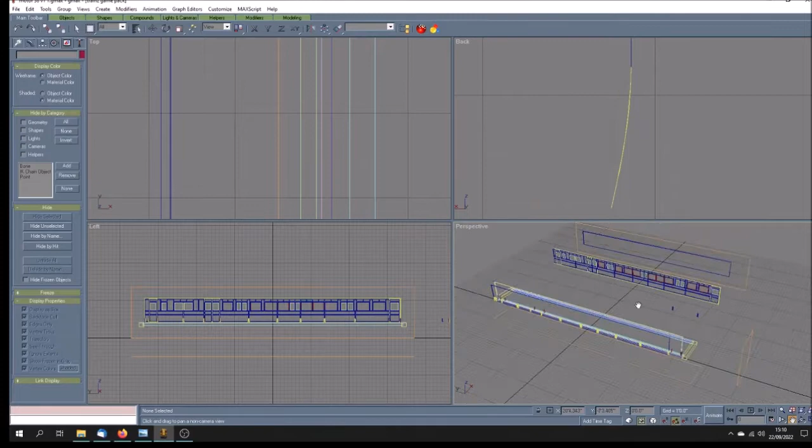So here we are in Gmax, and I have a couple of books about the rail motor, and from one of them I was able to get some outline plans. You can see here quite a lot of effort gone into getting all of the beading and panelling, and I got this done fairly quickly, and it's only now, after several weeks of work, 3 or 4 weeks of work on it, that I realise it's wrong. But there you go, that's the way things happen.

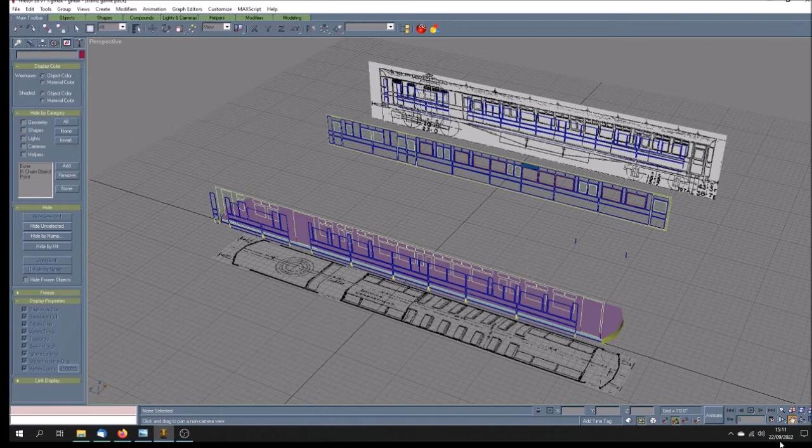So here it is, I'm doing motor 38. Now these rail motors were introduced from about 1906, and there were about 100 in the fleet altogether, and although 93, that one that's been restored, is the only surviving rail motor restored into full working condition, at the moment it's back in its shed in Didcot, because its 10-year boiler certificate now needs a new certificate to be obtained.

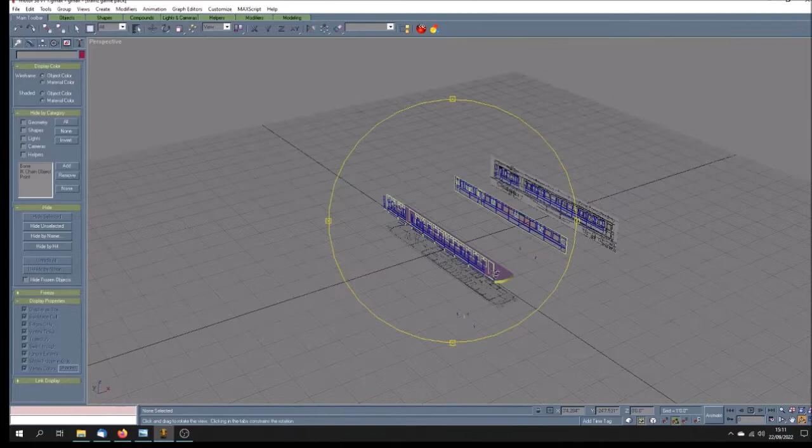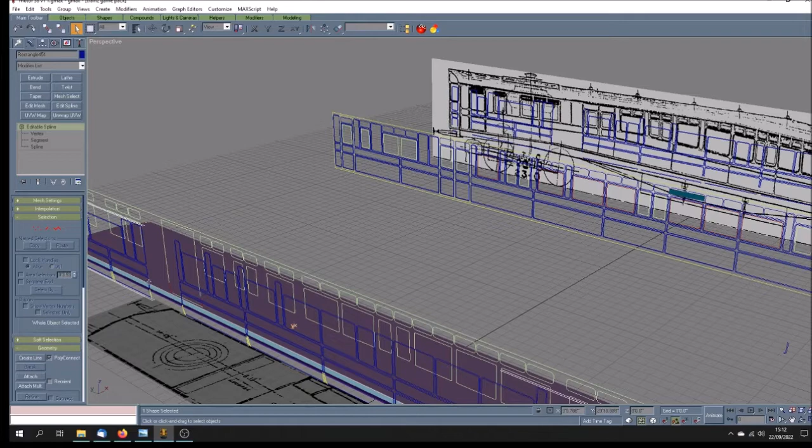So this is where I started, and I was planning to allow for the panelling. You can see there I've got lots of splines. If I just click on one, you'll see what I mean - that's a spline there. So let's have a look at all the vertices, and this is the flat, but of course it's got a tumble home - it's got a curve in the bottom of the sides there, so you have to allow for that, and believe me, it's been difficult.

It's probably the best way to describe it. But anyway, I have got on slowly. This is just version 1.1, as you'll see in the top left there. So let's open another version.

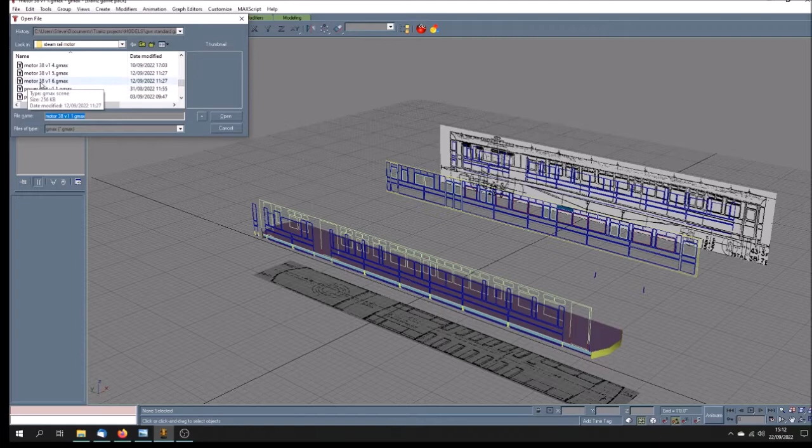No, we're not going to muck about with it. Let's jump forward to version 1.6, and you'll see immediately that there's quite a bit more work.

I always save the different versions, because if I have to go back to change things, as indeed I'm now going to have to do, having just over the last few days realised I've done the panelling completely wrong.

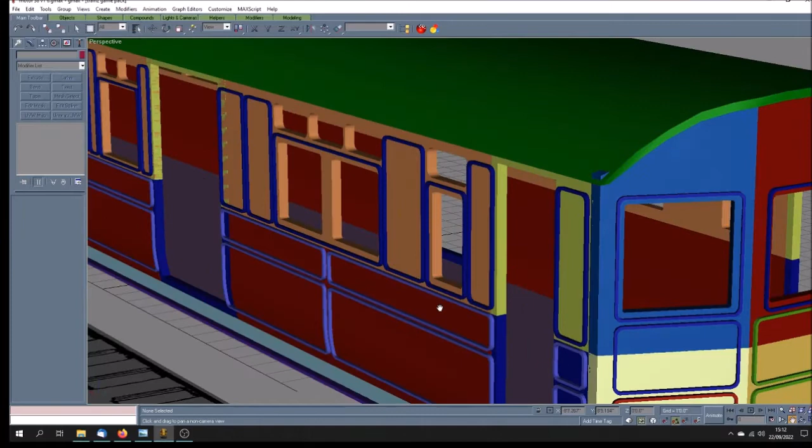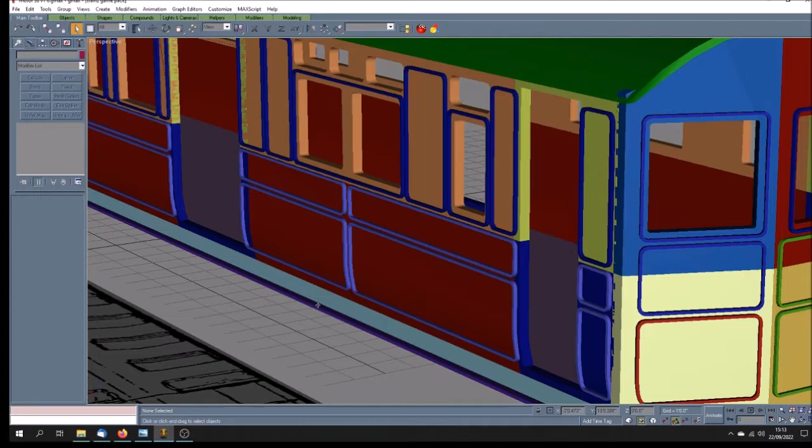And the reason why I say it's done completely wrong is you'll see in these bubblegum colours of the actual meshes that I've got the sides here in sections, and then I've actually got what should be panelling done as raised meshes from the side. So what I've got to do is look again at my plan, and basically I've got to alter all of those. They just can't stay as they are.

Let's just get that texture correction so you can see. What I've done is I've sort of traced around that, but then I've assumed it's been a raised beading. Well, of course that's not the case. If we have a look at that plan, come in a bit - all of this is the outer edge, and there's another outer edge there, so this should be recessed back about half an inch to the carriage side. This stands out about half an inch. This is an inset panel, comes out half an inch.

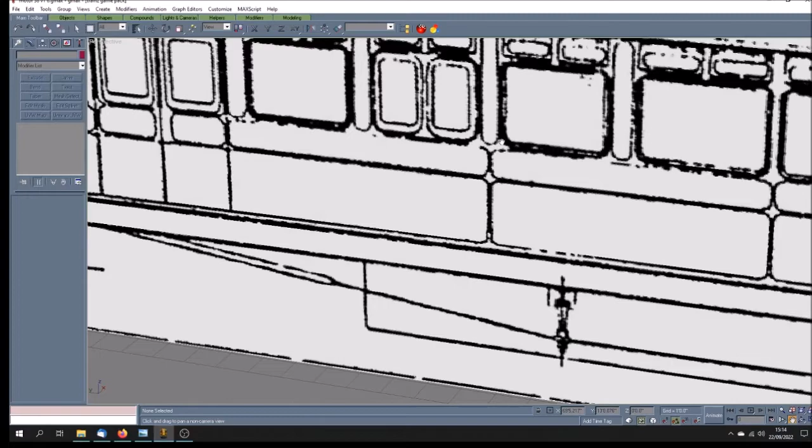So basically what I've got to do is redraw all these, because when I created these in the first place I've drawn into the thickness of that line that led up the garden path. So I've got to change all of these, alter the way in which they're appearing, and you'll get an idea of what I mean when I show you, because I'm going to be producing versions in both the maroon, which is that lovely colour, very Edwardian colour for the GWR.

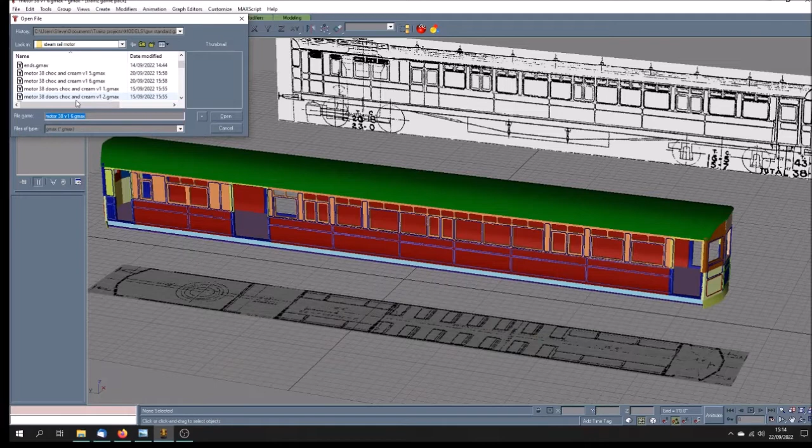So I shall be producing versions both in this colour of every rail motor that I do, and also in the later chocolate and cream. So let's open up one of those versions.

Ah, that's the doors, that's no good, just chocolate and cream doors, and in fact those are all wrong because I've got to alter the way in which they appear. Here we go.

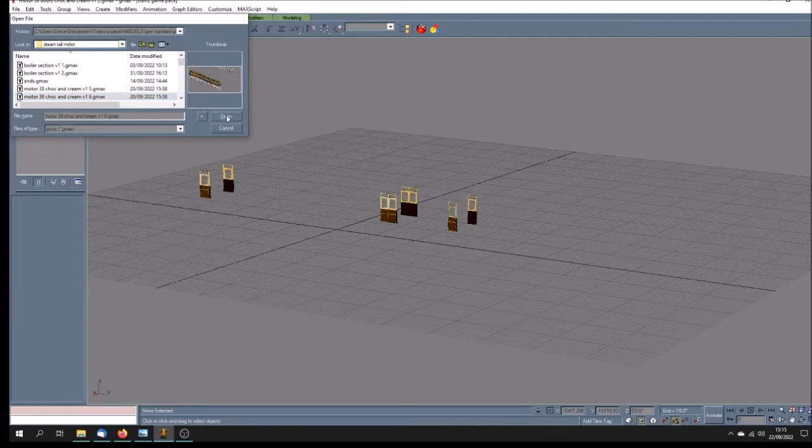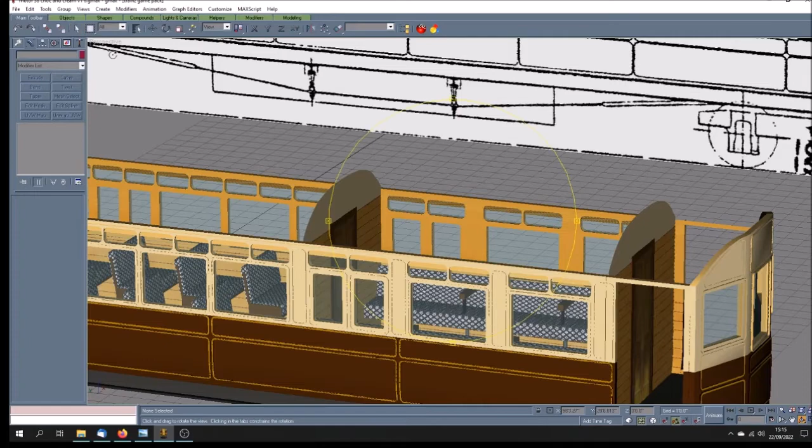So here's the interior as well as the exterior, and you can see there what I've done - this is the reason why I've done all those meshes. I think it'll be a bit more obvious if you look at the side. If you look over here in the right hand corner, you'll see that what I've done is I've just created a beading, raised beading all the way around, and that's wrong. What it must be is, this isn't a beading, this should just be the inner edge of the rather complex mesh which comes out to the edge here.

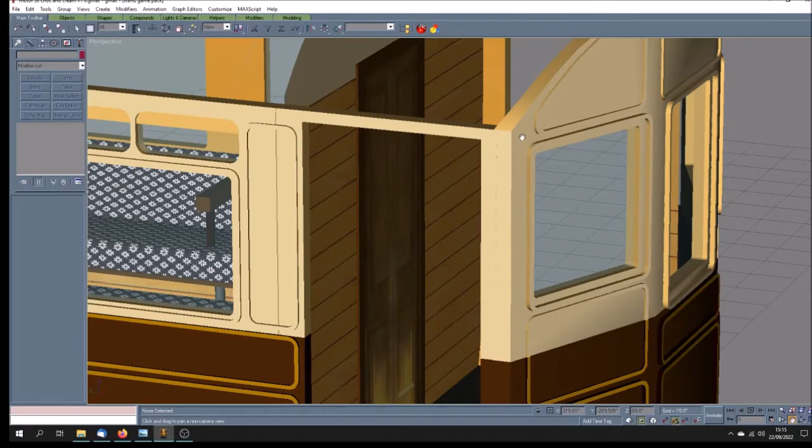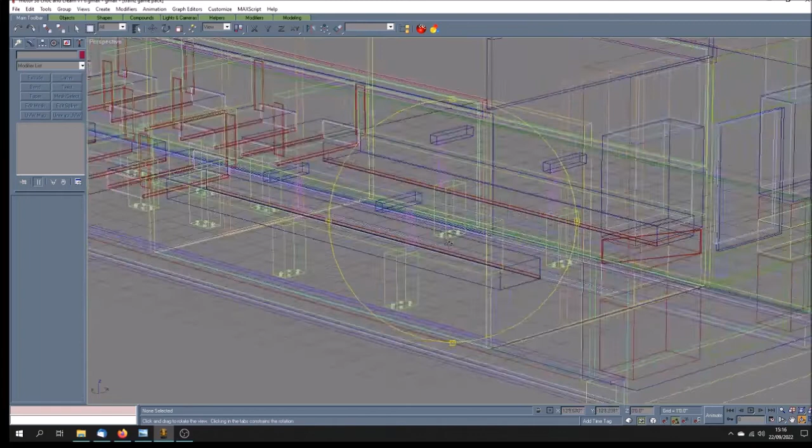So all of this should be half an inch deeper, and then once I've done that, on this chocolate and cream version, it's not too bad, but then the lining, as you can see here, I've actually used that beading. I've painted it, it's a bit too wide for the lining. So once I've got the beading on correct, in the correct colours, in the chocolate colour, and I've got an inner area here - I know this might sound complex, but it just takes time.

Once I've got that correctly done, then what will happen is that all of this area will be half an inch deeper than this, sticking out half an inch from this, which is the inset panel, and then this lining out will be thinner, and will simply - we can't see it on the maroon one - but these upper sections are going to be lined out.

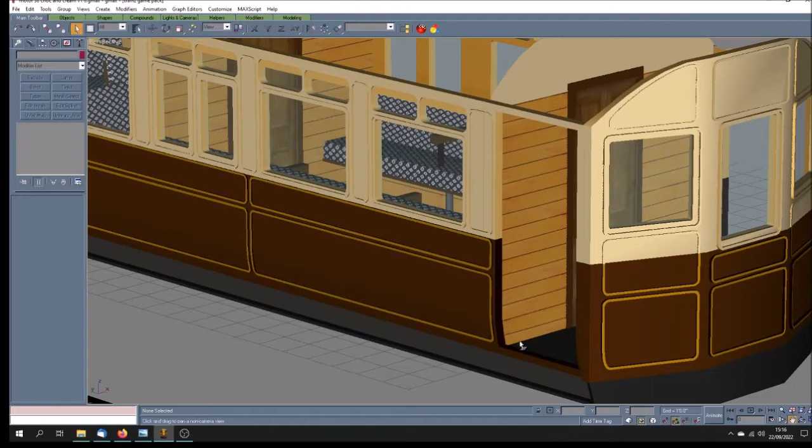So that's what I've done wrong. I've done this correctly in other GWR carriages. I took a fit of the head staggers and did it wrong. But you can see that apart from that, I've been getting on with the interior.

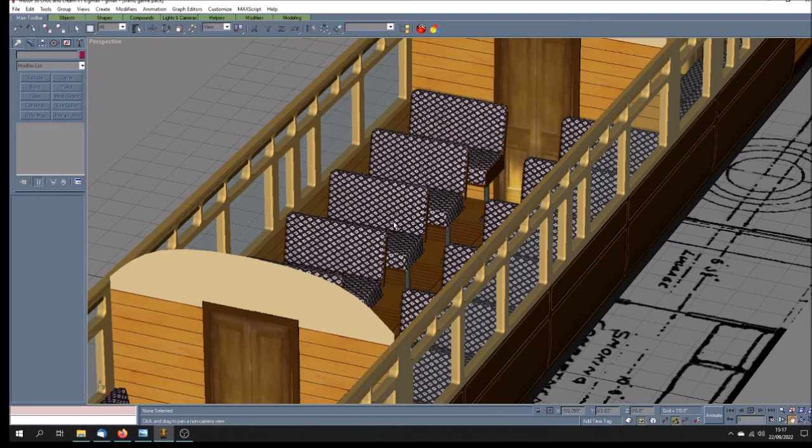Now this is the correct texture as fitted to both the rail motor and trailer at Didcot, and we've got the interior doors, sliding doors, and I've got the floor with these wood slats in the correct position, and this is a smoking compartment down here.

I'm not quite sure what this compartment is. Oh no, this is the - there we are - this is the smoking compartment, it's this compartment down here. Actually, it looks like here I'm wrong, and that I shouldn't have that partition in there. I need to lose that, so I'll do that.

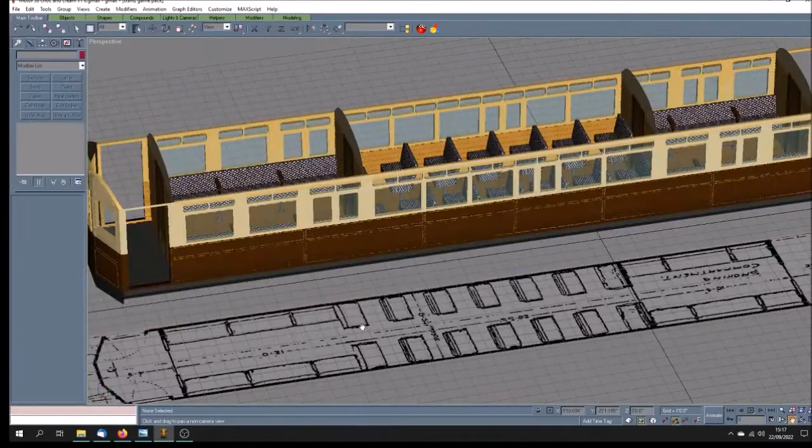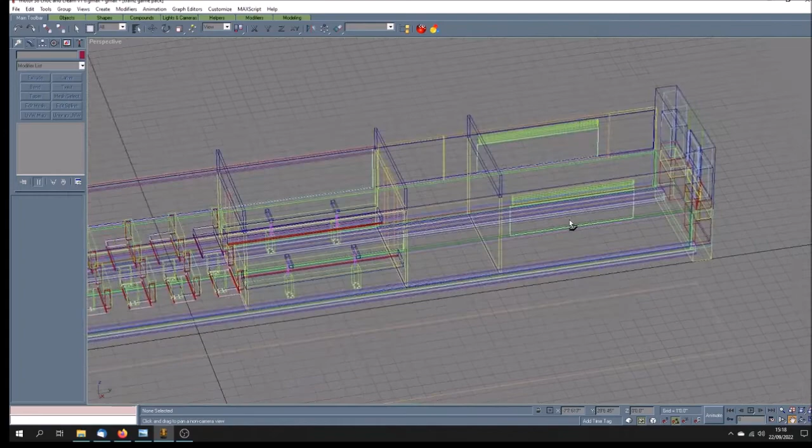So we get more of a sort of open saloon, and underneath the roof, which I've hidden in this display, there will be longitudinal poles and straps. So strap hanging comes in with these rail cars. And this is the power compartment, so this will be the driving compartment. This is where the boiler is going to go, and I'll come on to the boiler in a minute, because that's going to be another great big job in itself.

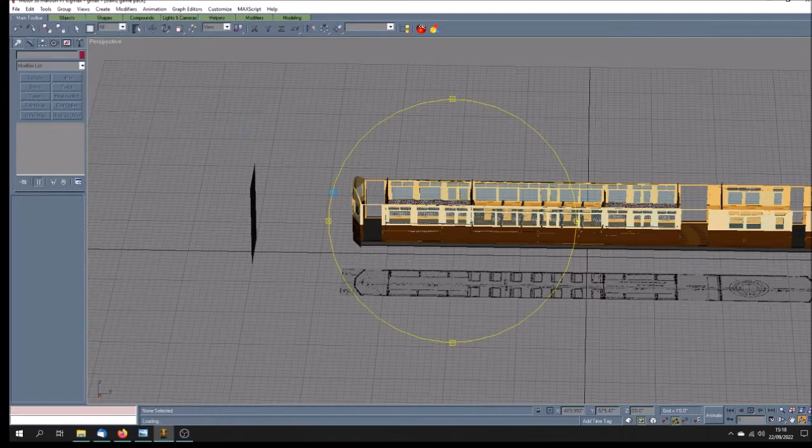Well, apart from doing this and more or less getting it wrong, so I've got to go back and do that, but that's okay. What else have we got? We've got the maroon version. There's the doors, maroon. Now I haven't done the interior on this, and obviously what I'll do is I'll copy the interior from the chocolate and cream version over to this.

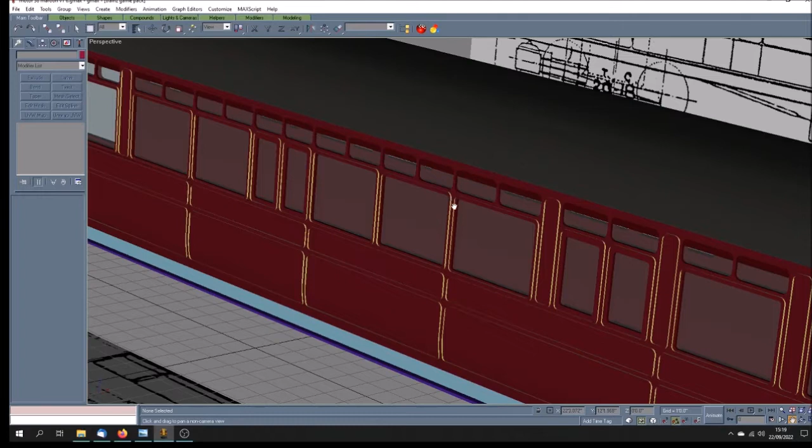And what I did wrong here is that on that panelling I've actually edged it with the lining out colour, which is wrong. That lining out colour, you can see it more easily here, should be on top of this, not on the edge. And in fact that edge shouldn't be there, that should be just raised up across to the next bit. So it's a real object lesson of being patient and being prepared to rip apart everything that you've done and do it again.

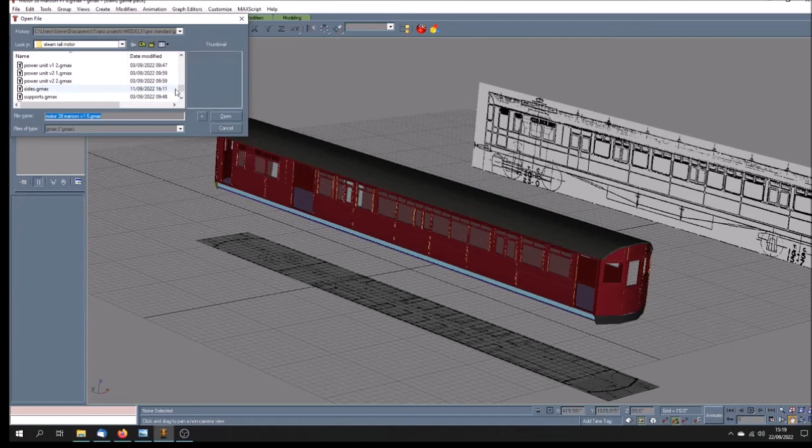But happily, I've also done the power bogey, and this was in fact one of the first bits that I did. I always tend to start with, if I'm doing a locomotive, and this of course is partly a locomotive... Cancel. What am I doing here? I'm just trying to save that. Power unit, here we are. Just open that. There we are.

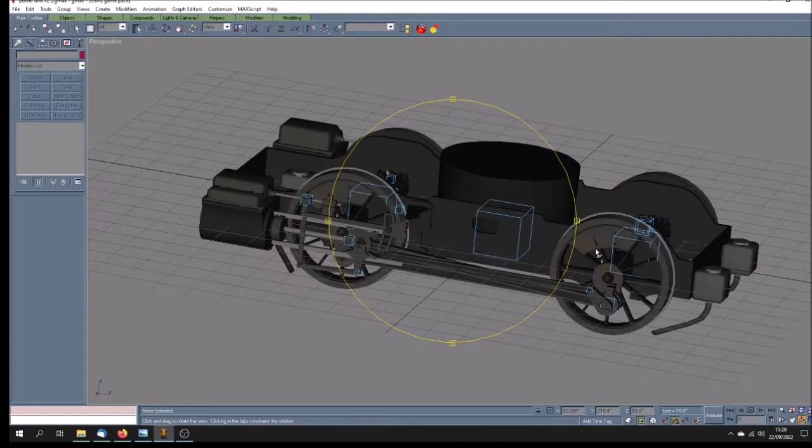So what I've done here with the power unit is, as with all of these, it's a bit of a compromise, and it took a little while. It's Walschaerts valve gear. Now, there's still some detail to add to this, and you also get some strange effects when you pull back in Gmax. You get spokes appearing where there shouldn't be, where the balance weight is in the wheel.

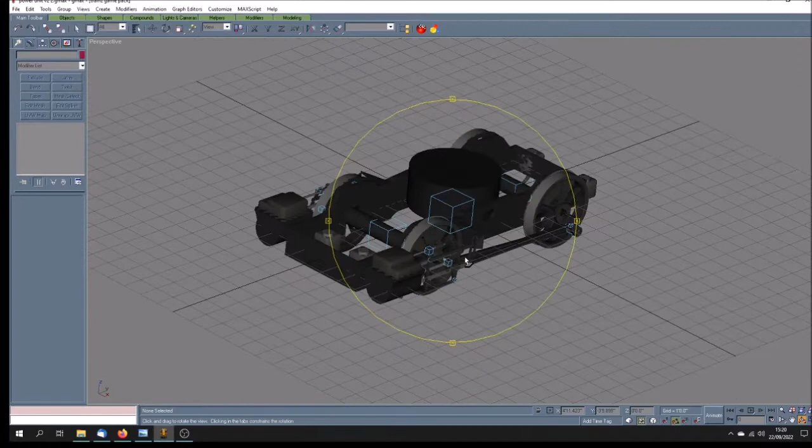This is the bottom of the boiler, and it's coming up to floor level, but this is going to be the power bogey for Trainz. In the originals, a whole lot rotated very slightly in the cab - at least that's how I read the book, I'm assuming it's right. But anyway, for Trainz, happily, it's more straightforward than that. So let's have a look at it actually running.

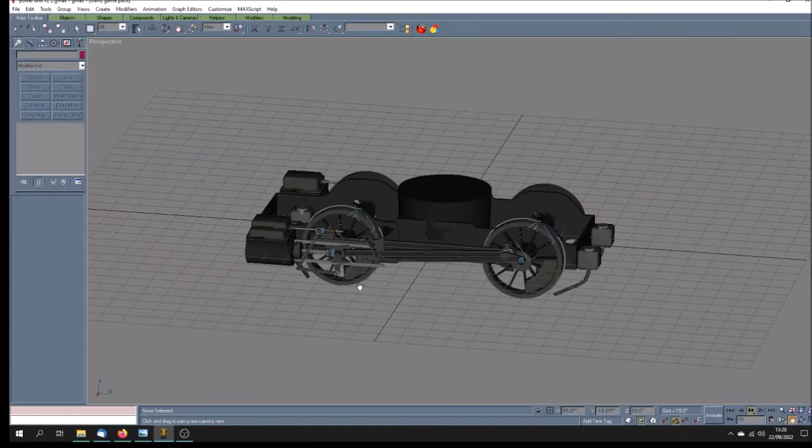So there we are, that's the Walschaerts valve gear firing away. That was fun making, because there's quite a lot happening, and actually it's a simplified version of Walschaerts valve gear which I've made for this, because to have done the whole thing, every part, it would have been extremely complex, and it would have put the poly count way up, so we don't want that.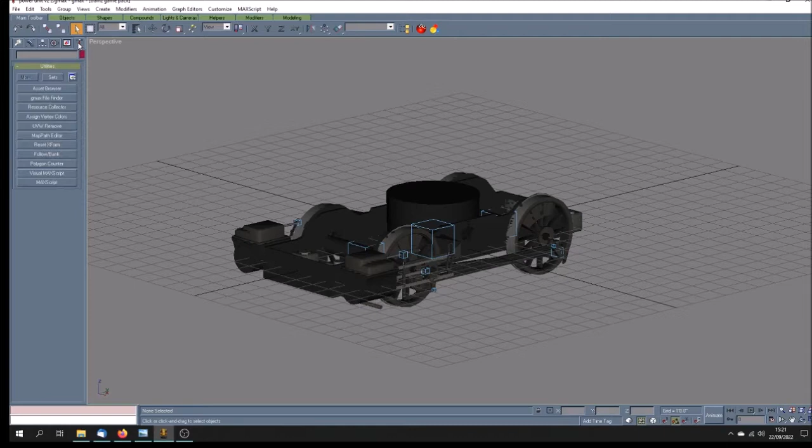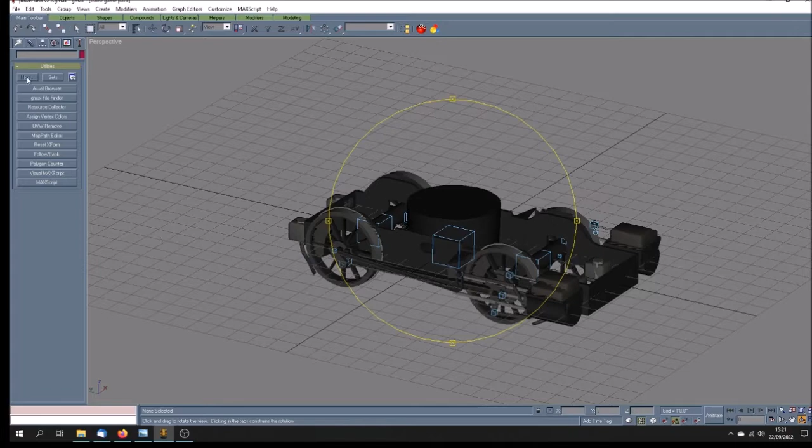So there we are, let's just go back to 0 there, and just to give an idea of the poly count for this one, it's just under 10,000 for this bogey alone. So if I add some detail, and the sort of detail I'm thinking of adding are some bolt heads, some rivet heads, which will each essentially just be a piece of a plane. There we are, one poly plane with a bolt head on it, just pasted on to various places where it's meant to be.

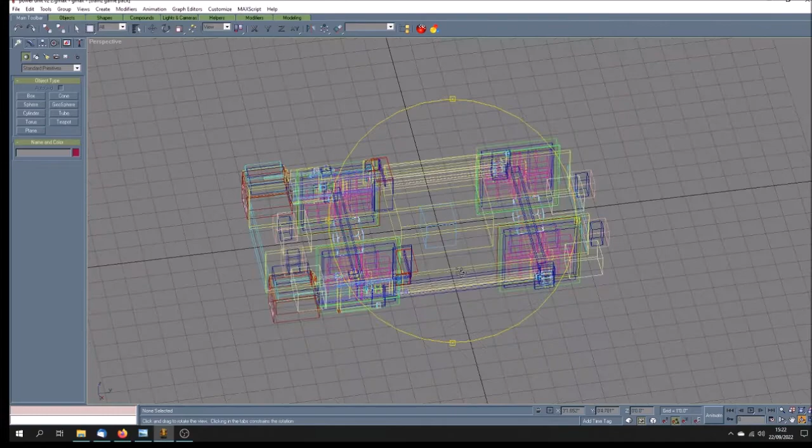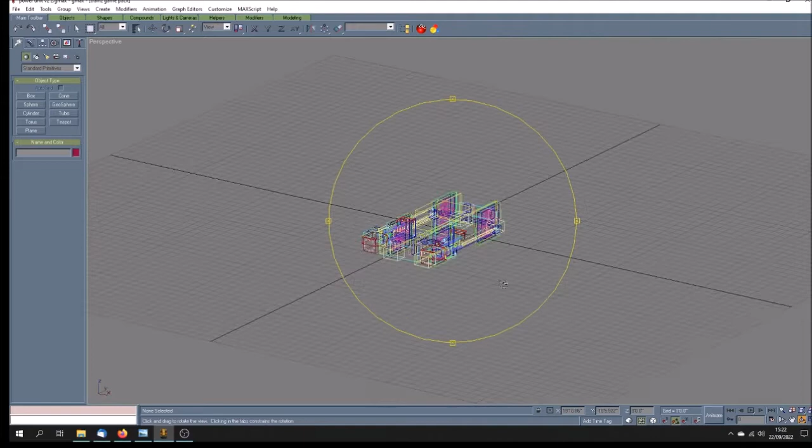But that is more or less how it should be, I'm just looking down on that. I've simplified this framework here. On the original, the guys in Didcot did a fantastic job recreating all of this, and so I chickened out - there was a curve in part of this which I just ignored. Essentially, of course, once we get it onto the vehicle, the main item in Trainz, you're not really going to notice it.

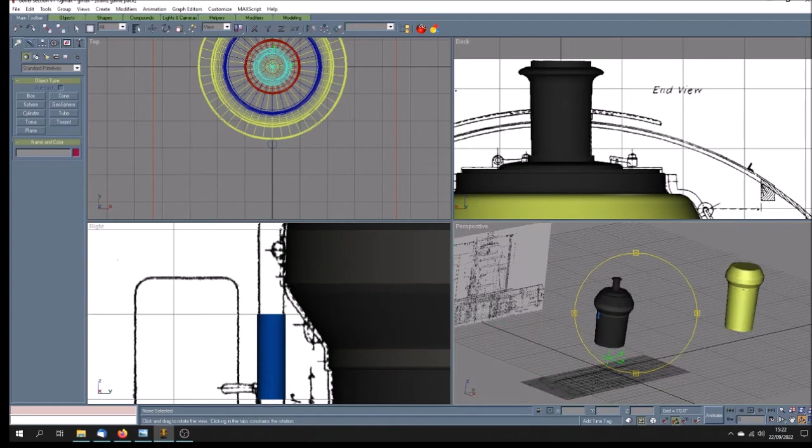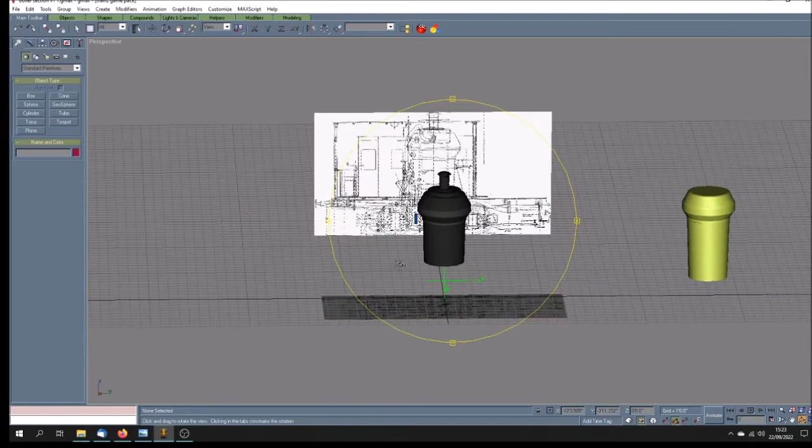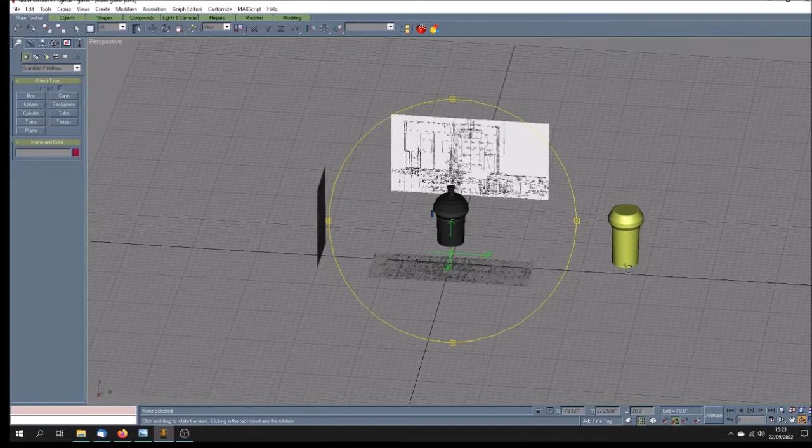In fact, it was when I started on this I realised - I think it's Russell's book on the Great Western Railway locomotives. Years ago I'd looked at this particular diagram of this rail motor, and I thought, my goodness, I'm never going to be able to make that, and I've never tried to make it, so this really is something new for me. So this is just the first stage, and you can see I've got the main sort of shape of the boiler, and I've got a bit of tube there, and I've also kept a copy of the boiler just here, just in case - so this is part of my construction process.

And what you can see, I'm not sure what I've got down there, is that main?

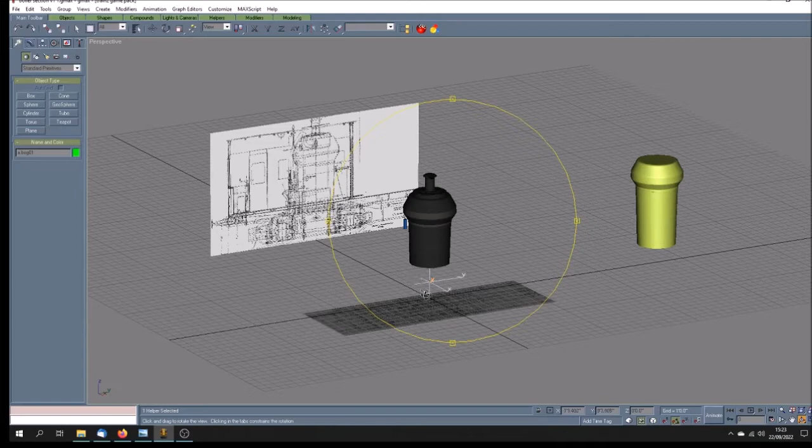No, a bogie one. That's where the first bogie is going to go. So that Walschaerts valve gear bogie which you saw is going to sit under there, and that circular piece which you saw on the top of the Walschaerts is actually going to marry up to this. Because it's circular, if that bogie moves slightly, pivots around going around a curve, it doesn't matter because this won't move.

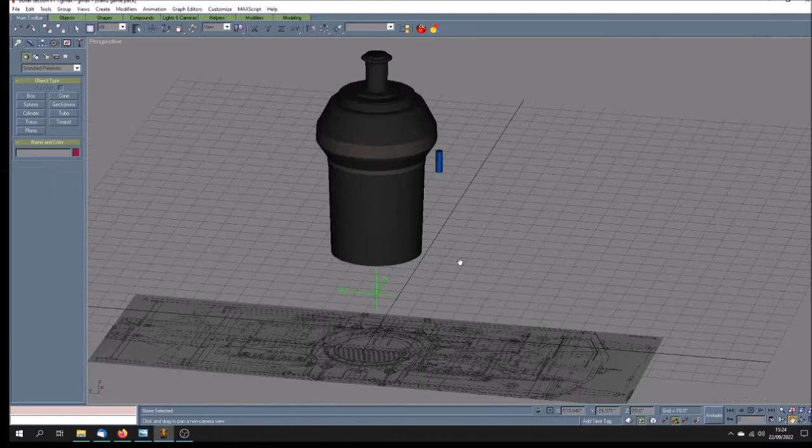I've got some very good photographs, especially of the restored rail motor number 93, as I bought a couple of books. They're proud as punch, and very proud indeed of all their efforts, considering how long it took them to reconstruct from the somewhat parlous state of the original vehicle. I think they've done a fantastic job, and it's going to be a really lovely addition to the Great Western Railway fleet, and I'm enjoying making it.

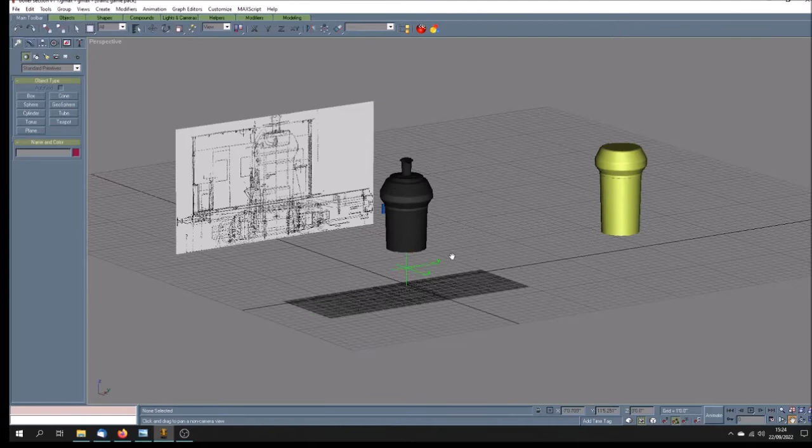I'm going to take my time. There's not going to be another video for another month, I wouldn't have thought, to show any progress, but I thought I'd bring you up to date on what I'm doing at the moment. So eventually we shall have Great Western Railway.

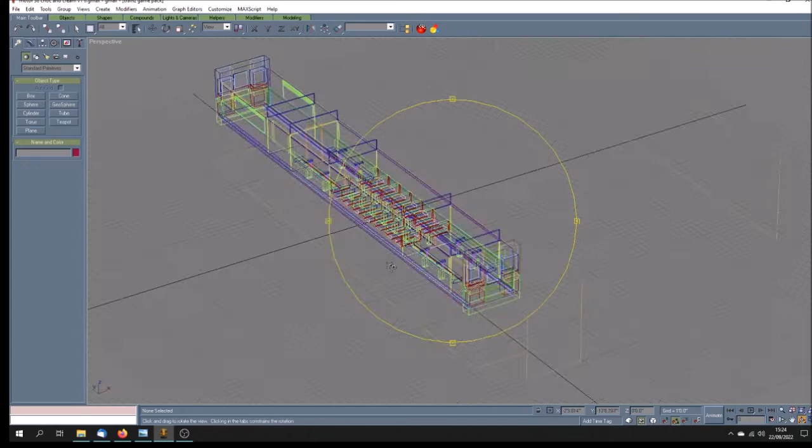Let's have a look at the chocolate and cream one again. Here we go. We'll eventually have the Great Western Railway rail motor, and this is just number 38. As I say, there are about 100 of them, and a number of different versions, particularly seating details, that sort of thing. Sliding doors there.

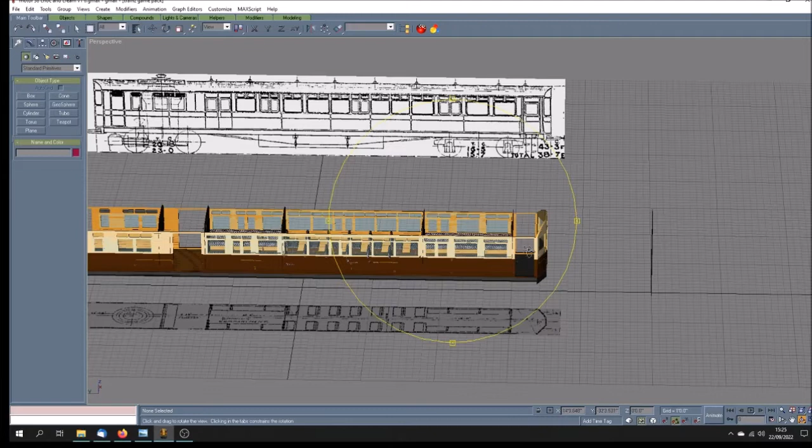That's a hinge door there. Up for the, no, I think that's a sliding door actually. That one, no, that's a hinge door. That one, I think that's another sliding door at the other end. Yes, it's a sliding door where the boiler is, and it just slides into the slot here, and slides into the slots there. So plenty to do, but very enjoyable doing it.

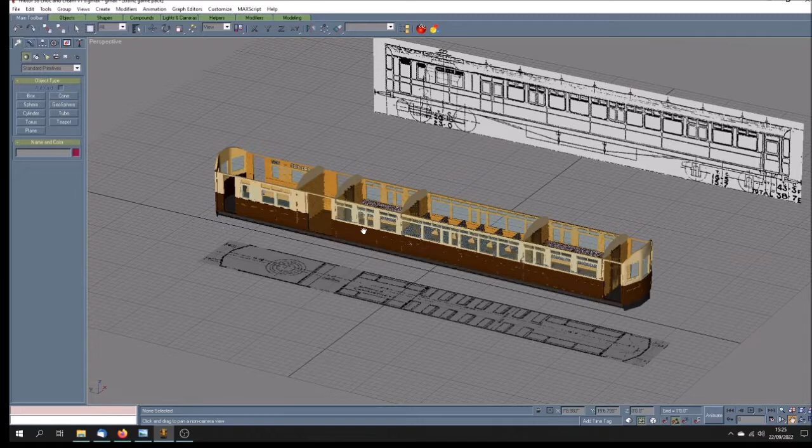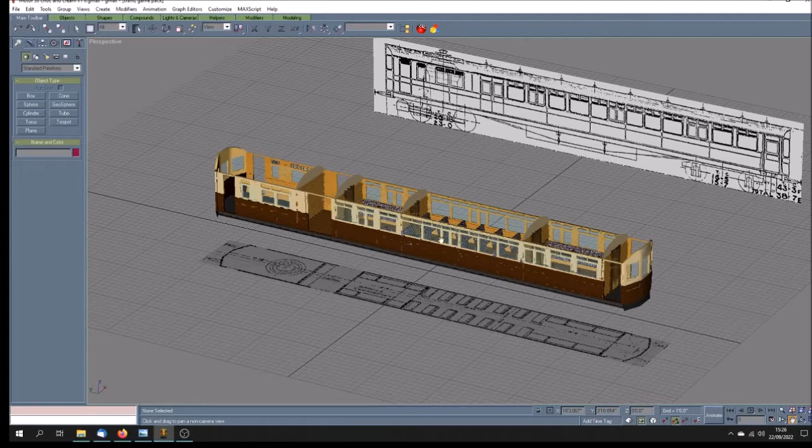It will eventually see the light of day, and number 38 will be the first of a series of steam rail motors. I'll do several different types, different seating layouts, and I'll aim to do the maroon and chocolate and cream versions. Maybe after I've done this first one in the two colour versions, I'll just bang out a trailer. There were different types of trailers - one was clerestory for the early one, and the earliest rail motors actually had flat-sided, matchboard-like sides, and I may make that, I may not. I'm undecided yet, because there's plenty to do before then.

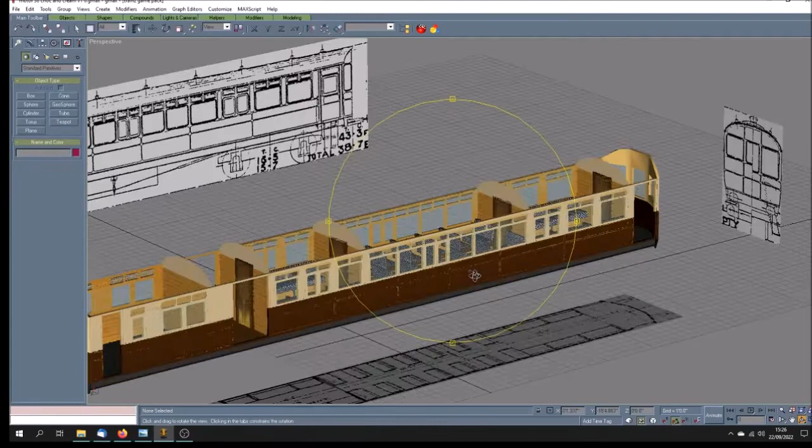So there we are. I hope you've enjoyed the video, just bringing you up to date on what I'm working on at the moment, and I hope that's going to start your anticipation for loading up a lovely vehicle into your Trainz Rail Simulator Great Western Railway layout.

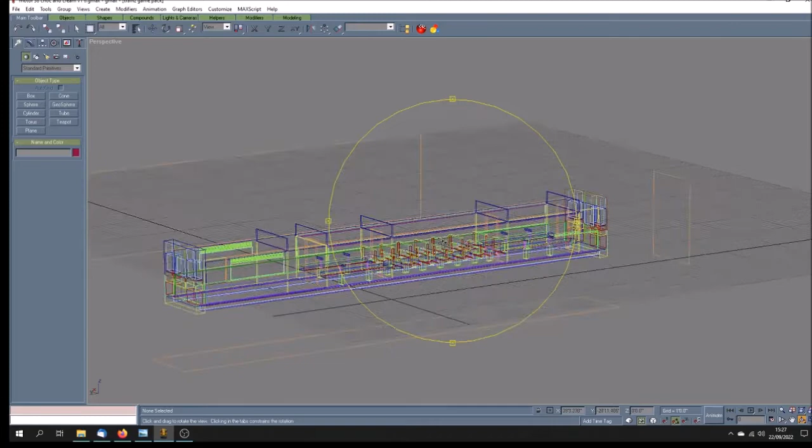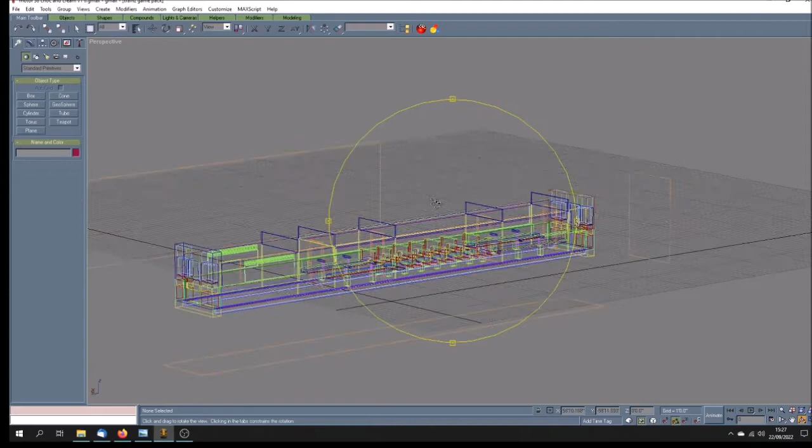I've had a couple of questions about where you can download GMAX, because it's been discontinued for a number of years now. If you just do a quick search on Google, you come up with a number of sites - I don't know whether they're safe or not, you have to check them out for yourself. Make sure you've got your antivirus fully functioning, and make sure you have the registration workaround, which is a simple little text file that basically lets you use GMAX, because it's now essentially a defunct program.

I still like it, and I'm still going to carry on modelling in it. I much prefer it - I've never got my head around Blender - and so I'm going to carry on banging out these sort of models free of charge for Trainz Rail Sim.

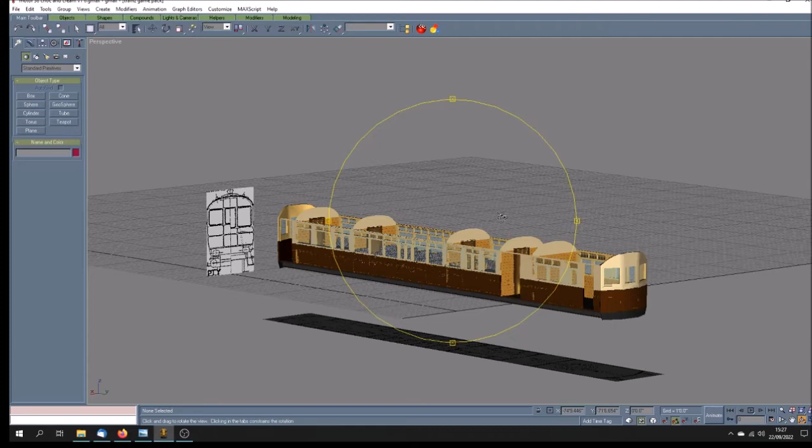GWR steam rail motor number 38 is on its way.